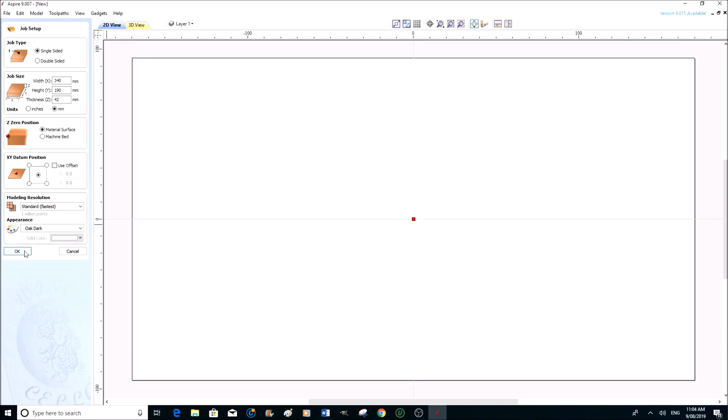Now if I was going to draw, I could use these tools here and draw any shape that I really wanted to, and even make 3D objects. In the future we will be looking at all these different tools and manipulating tools, and we will be doing just that, making three-dimensional objects.

But in Aspire there are over 600 clip arts of 2D and 3D objects, and here they are.

Incidentally, Aspire is probably the most powerful and the best priced CNC routing, milling software on the market today. So you won't go far wrong if you are in the market to purchase software. This is probably the one to go for, especially if you're a serious hobbyist or even a manufacturer.

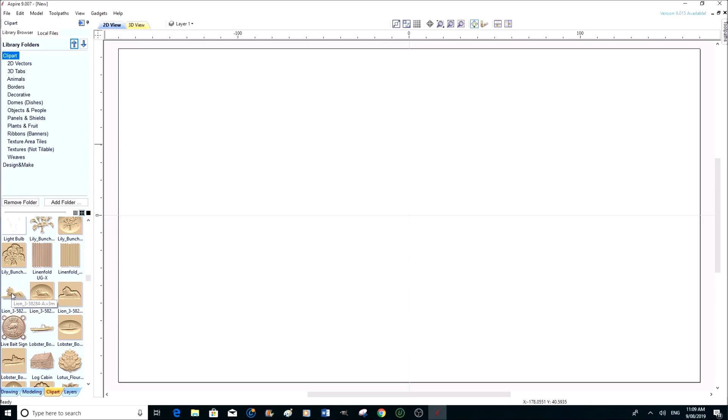So we're going to take this particular one here. We're just going to drag and drop it right in the center of our material. And then we're going to very simply enlarge it.

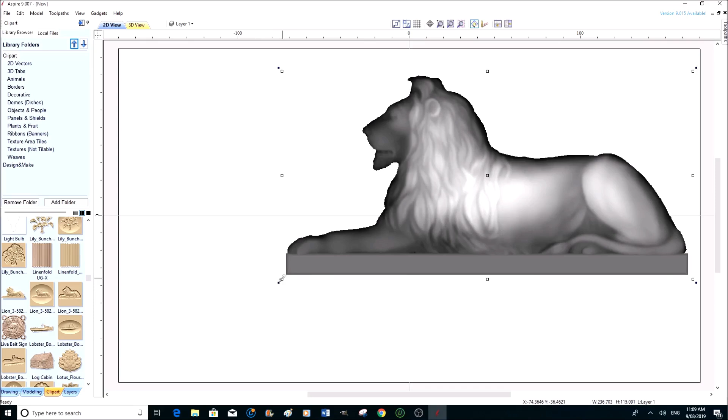So we're just going to catch hold of one of the corners here and pull him up. I want to make him as large as possible in this piece of material. Some of you may have seen me do this process with an eagle in a different program. These programs are all very similar.

So we could go a little bigger, not too much. And I want this - the way I'm making this model is I'm having the lion entirely in the oak, and it's going to have a pine, very light Tasmanian pine. Incidentally, all the woods that I'm using are locally grown in Tasmania. So we're going to have an oak lion on a pine background, which I think is going to be a very nice contrast.

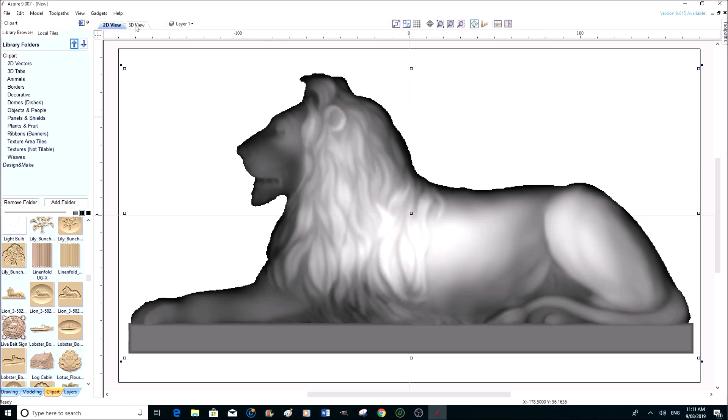Well, I'm happy with that. Have a look at the 3D of this now. I'm very happy with that. So now we can come out of that and go to the modeling window.

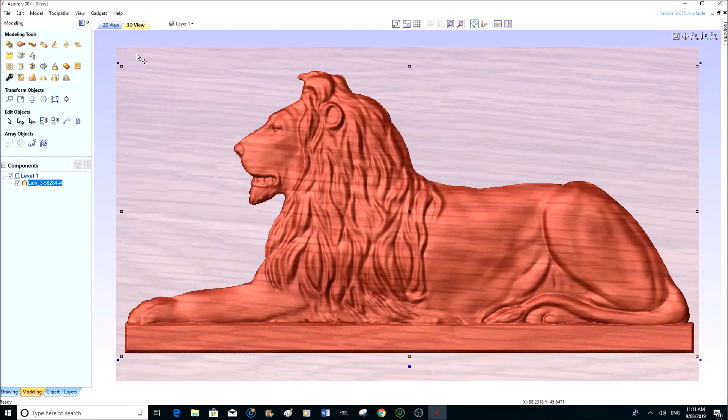Keep the lion selected, because the next thing that we want to do now is make him a little deeper, because I'm not sure how deep he is. We'll have a look. Not very deep at all. It still would be quite a presentable image, but I want him to stand right out.

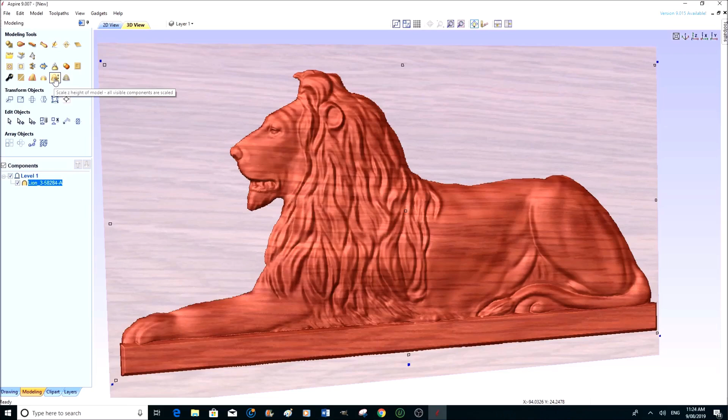Okay, so we're going to use a very powerful tool which resets the size or the depth in Z. Very simply done. Now you can either use this slider bar to slide. Let's try around about roughly 200%. We'll have a look at that.

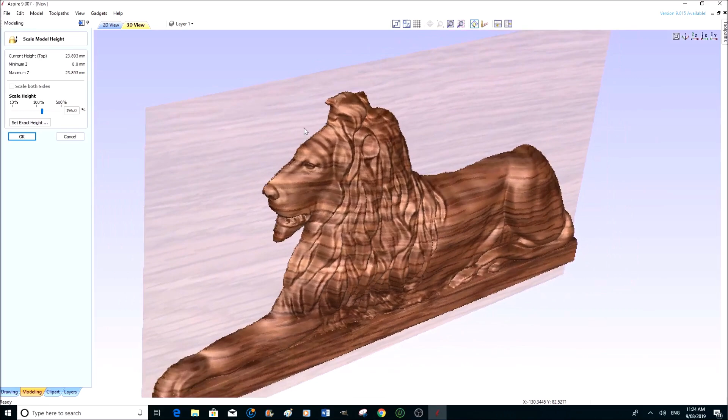Well, it's brought it up quite a bit, but you can see here the actual measurement is 24, nearly 25 millimeters, which is an inch pretty well. I'll go a little bit more than that - 38. Let's have a look what 38 millimeters looks like.

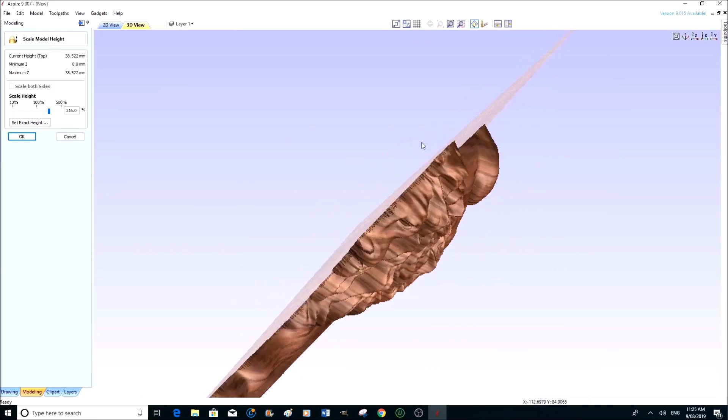And that's the thing with this particular program - that's very nice, look at that. And you can see that when you increase the Z height, all the muscle tone of the lion and the mane and the hair all stand out a lot better.

And we can go a little bit more. 42 is absolute. 40 and a half. I think that's going to probably be about it, but we might be able to come to 41. 41 and a half - I think that'll be it. I'm going to allow myself 0.5 millimeter of excess material on the top, but I can machine very slightly down into the pine as well. So that's probably going to be our maximum.

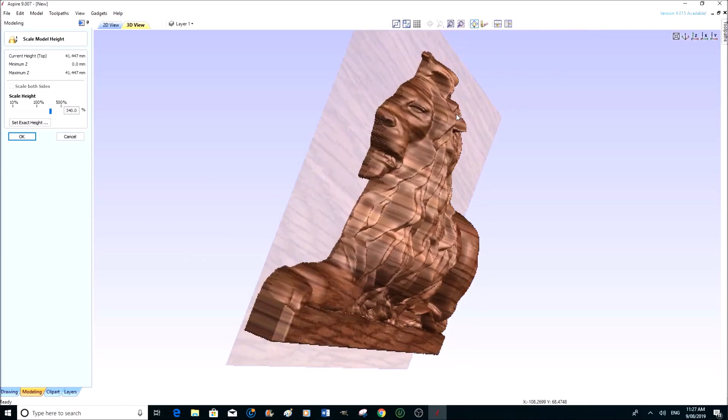Let's just have a little look. What I'm looking for is to see if I've distorted the image at all. And it looks to be quite presentable. It looks to be very, very nice.

In actual fact, what you could do with this, if you wanted to, and we will one day do this process, is machine this side and then turn our material completely round and machine the other side, put a mirror image, and we will end up with an entire lion. But that will be for another day.

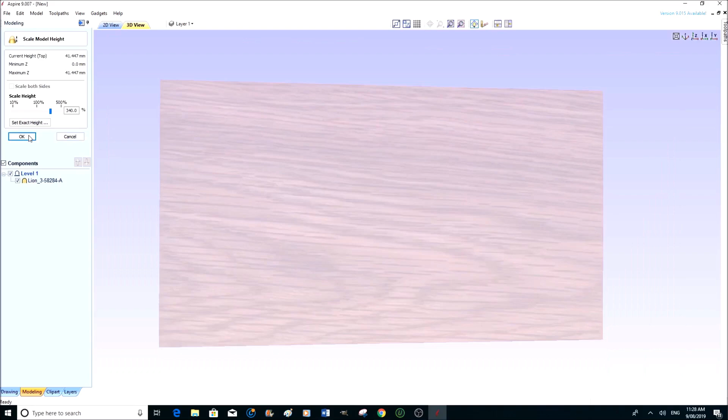We'll learn to do just this type of 3D machining first. So we're going to say OK to that. And there it is. So we've now finished the manipulation with this lion. We're happy now with this three-dimensional model.

So now we go on to the machining, and that is very simply done. There's a little arrow, little box up here, and this will take us into the machining window. Okay, so here we are in the machine area, which gives us all the different types of strategies for machining this part.

You can see here there's two-dimensional or 2.5D machining, which is like pocket machining and what have you, lettering. So the machining strategies that we require is 3D. So there's one here and one here. So we want to start off with this one, which is a roughing process.

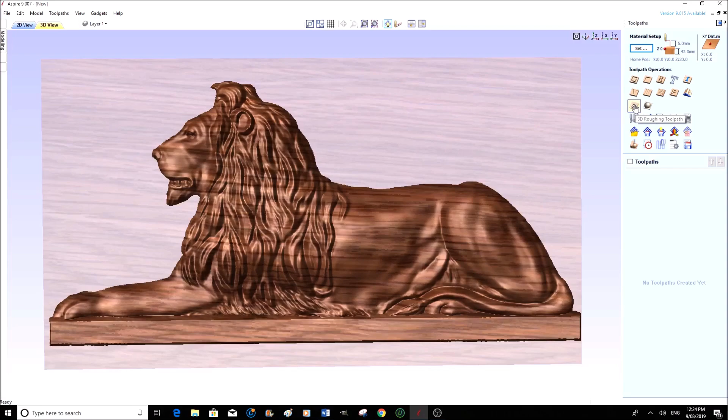So we're going to click on this one, and the dialog box here is very similar to the startup dialog, where it asks you very similar questions. Now this is the material thickness, which is the same, center of the material - you want to start in the center there, which is fine - top of the material. Start Z is the top surface of the material.

Now we don't want any gap at all. We're going to leave this as it is, but what we're going to say here, 5mm, that's okay. So the clearance is going to be 5mm, and yep, that's all fine. We can leave this as it is.

Home position 0, 0. In other words, it's going to be in the center of the material. The home position is going to be in the center of the material there, which is exactly what we want. And we're going to set this at 10mm.

Just press enter then. So we're going to go now into the actual machining part of this. Now we are going to select a different tool. In actual fact, the tool that I have is a 13mm.

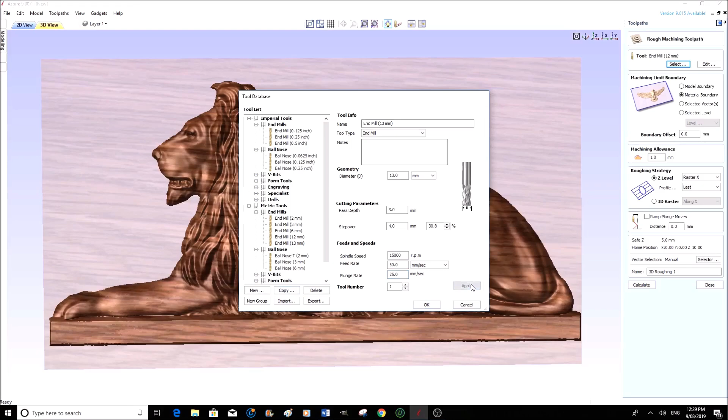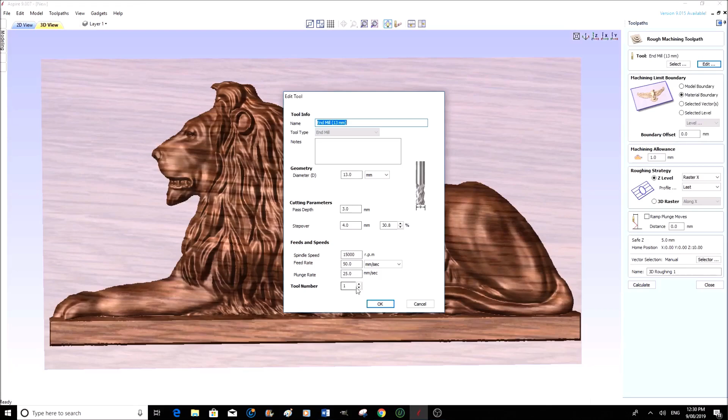Leave it as tool number 1, and we're going to apply that, and it changes now in the tooling list. And now we say OK, and we've chosen that tool. Up here you'll notice that it has changed as well. And now we can go in there and edit that if we wish. And if we want to edit any of these parameters, we can at this stage, but I'm happy with those.

Machining allowance 1 millimeter, that's fine. In other words, after machining over this entire model, it's going to leave a minimum of 1 millimeter of material left for the finishing tool.

Roughing strategy, Z level. Raster in X, that means it's going to go back and forth in the X, which is fine.

In actual fact, what I'm going to do to make sure that we encompass all of this material, I'm going to do a little trick here. Now I am going to go back to the 2D,

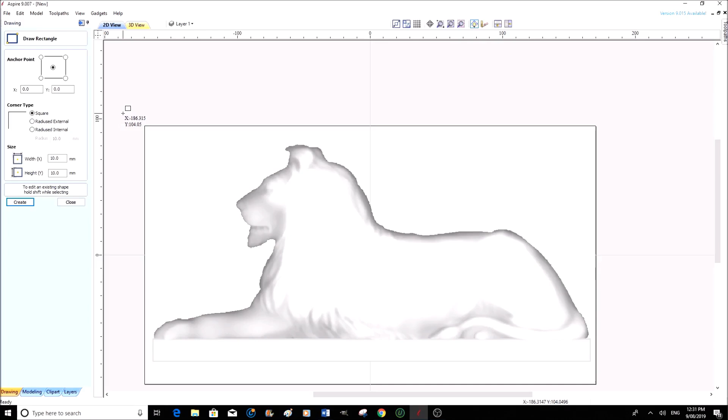and I'm going to come out of this, and I'm going to go to the drawing layer, and I'm going to draw a square on the outside of this model.

We don't need to be totally exact with this, but I just want to draw that square and apply. Create that.

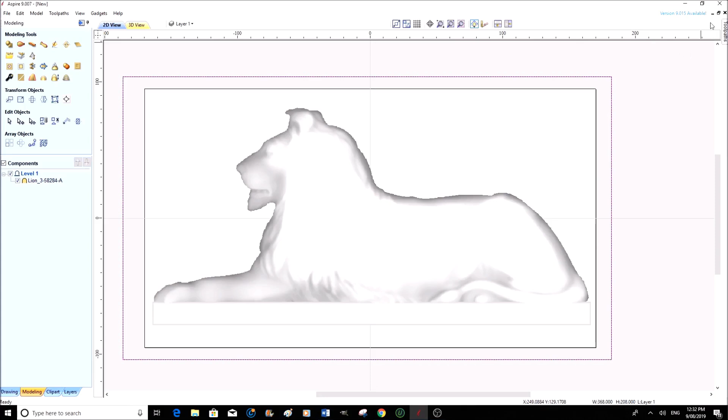Now choose the selection tool, select that. Now we're going to go to our tool paths, and we want to say model boundary, because what we have just done is we've made a boundary layer there.

So I don't want the tool to go outside of that. In other words, I want to encompass all of this material here. Don't forget, this is going to be 42 millimeter in height, and I want to get rid of all the material. I don't want a little bit left here.

So we're going to say model boundary, and then this is all okay. Ramp moves, yes, definitely.

Distance, I'm going to say 5 millimeters. Safe Z, height, home position, we've already set that. There's no need to actually add to that. I am quite happy with this. Calculate.

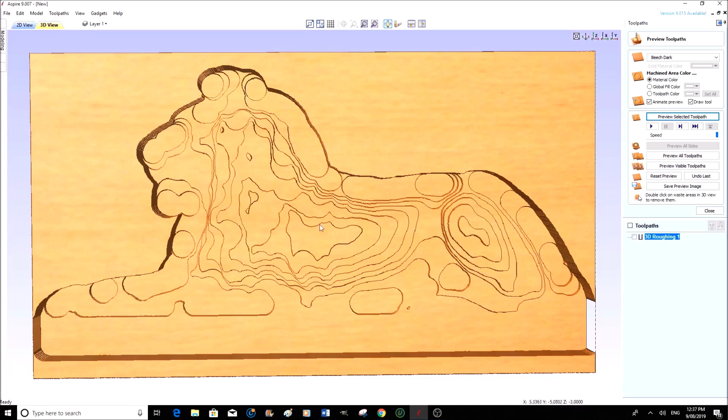I've just run a preview of the toolpath, and I can see that I have a setting wrong, because it's machined the lion part, but it's left an awful lot of the material behind. So we're going to go back in now and reset this up.

So go close. Back into the roughing strategy. Z Level, that's already highlighted.

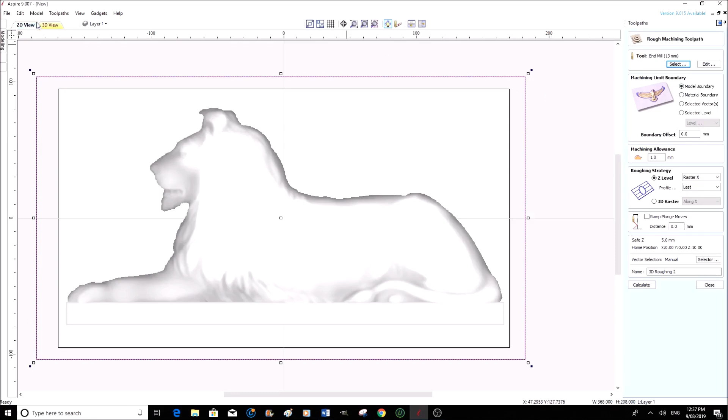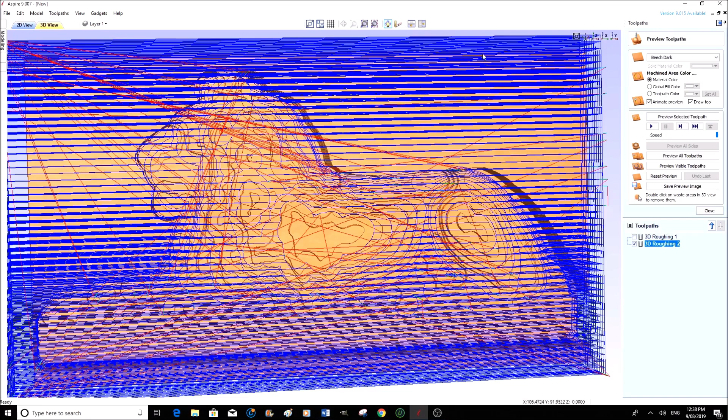Selected vectors, that's what we should have had. So calculate - that's better. Now you can see it has removed all the excess material, with a lot more toolpaths. So we'll run that one.

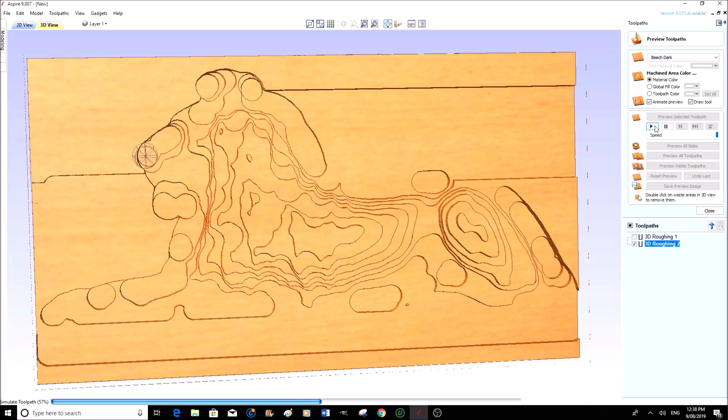And we'll see that we remove all of the excess material now. So to machine this on the machine, it's probably going to take maybe 30, 35 minutes to do the rough machining of this.

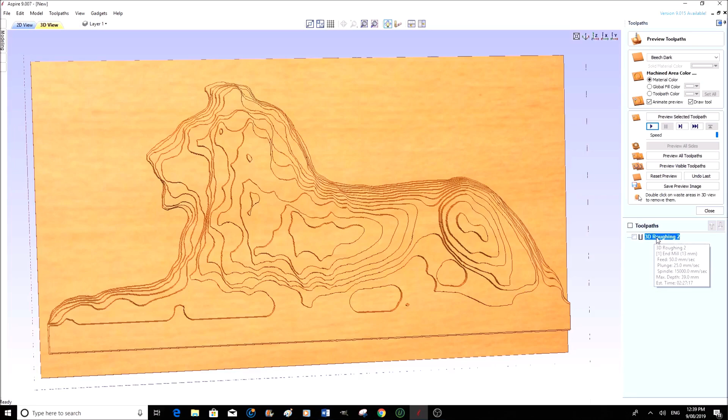Okay, so it's completed the roughing. This roughing here we need to delete, because we don't want to get confused. Delete this, so we're left with this one. And just to make sure we have the right one, let's calculate that again. Yeah, that is the correct one. Actually, we can change the material here too, because we have dark oak.

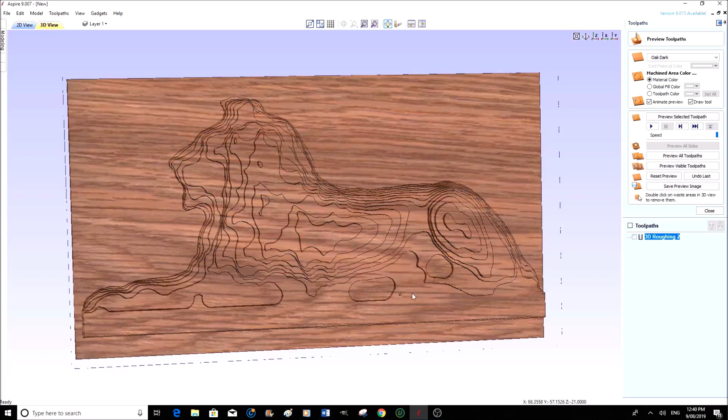Okay, so I skipped the process, and that's what we're going to end up with, and it's going to look exactly like that when we machine it on the machine. So now we can close this, and now we need to do

the 3D finishing toolpath. Okay, so we're going to select the tool. Now what I'm actually going to do is I created this and just named it to represent a tapered ball mill, but I found in the listing that there are tapered ball mills in there. So I'm going to copy this one, and then edit it to read tapered ball mill.

Now, diameter, geometry diameter, here we go. It is 6 millimeters in the shank up here. The tip radius is 1 millimeter. Now the angle, I'm not quite sure of the angle, but it's a very steep angle, so I think it's around 2 degrees.

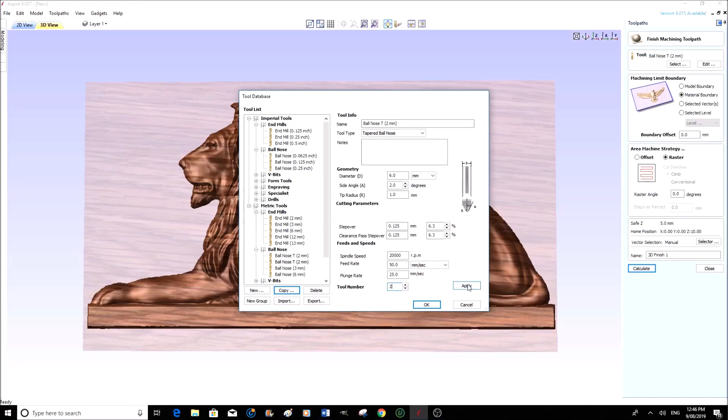This is now going to be tool number 2. Now this only really comes in when you put all the codes together into Mach3, and you want to write into the G-code that you want to stop the machine and change the tool. Or if you have an automatic tool changer, this will be recognized by it. So we're going to say apply, there, and OK.

We're going to edit that. I'm quite happy with that. So with this type of step over and these feed rates, this is going to take about 2 hours to machine the whole thing - approximately 2 hours. But we're okay with that.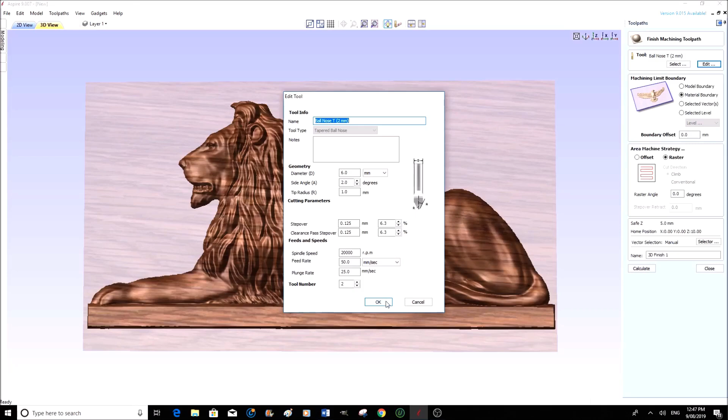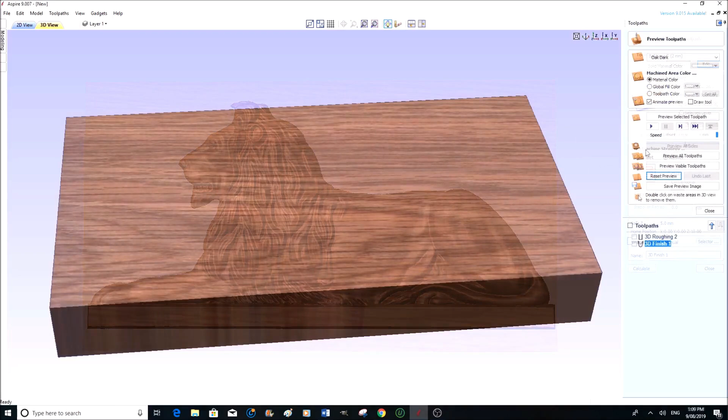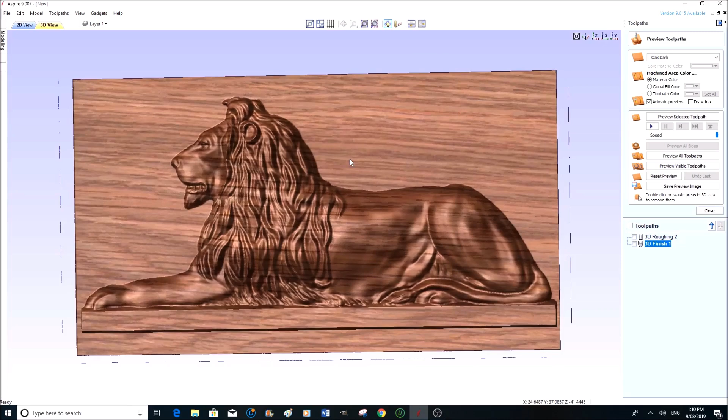Now what I'm going to do is get it to machine the whole thing, not just the lion himself, but this area as well, just to give it a nice finish. Okay, so now we're going to preview all our toolpaths together. There's our lion, and it's going to look exactly like that. So we can close that now.

So our next job now is to save that toolpath in a language which our machine is going to understand. So now we have to describe the language we want to save this toolpath in. All these are variations of G-code for particular machines. So what we're looking for is G-code, and we're looking for standard G-code millimeter tap - all machines understand that language.

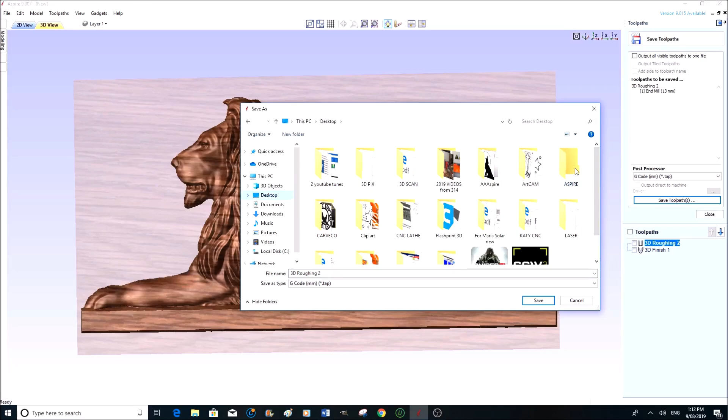So we're going to save that toolpath, and we're going to save that to - let me see - we're going to save that to our desktop, which is a very busy desktop. So we're going to save it in our Aspire folder, which is a fairly new folder because I've just started working with Aspire and it's a wonderful program. We're going to save that one.

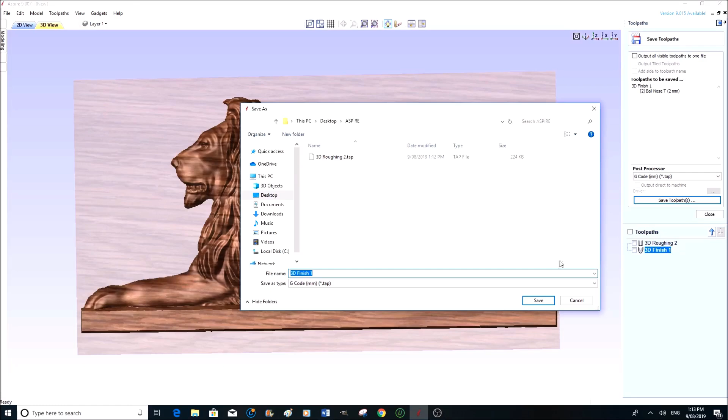So then we're going to select this one. We're going to save this selected toolpath now, which is the finishing toolpath. It will hold that G-code type that I've selected, and we don't want to output directly to the machine. We're going to save this directly to our folder on our desktop, and I'm not saving these under a particular label because I'm going to put it onto a flash drive and take it straight to the machine. And that's done. So the next job now is to set the machine up and we'll machine this.

I hope you've enjoyed this tutorial video for Aspire 9. Vectric has many different types of machining programs, ranging from Cut3D or Cut2D to VCarve Pro and so on. There's 6 to 7 different programs at different price levels. This is the top of the range of the programs, which is more of a real serious hobbyist program, or an industrial program. So there are lesser levels that will do what I have just done in this.